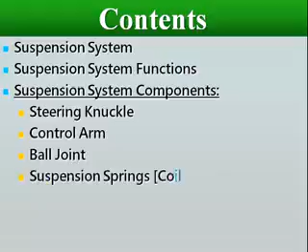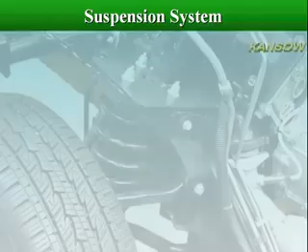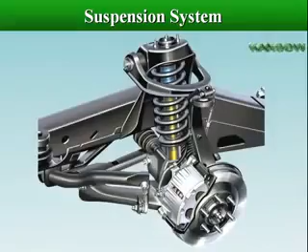Suspension system is the term given to the system of springs, shock absorbers, and linkages that connects a vehicle to its wheels, and allows relative motion between the two. The suspension system separates the wheel axle assembly from body. A vehicle needs a suspension system to cushion and damp out road shocks, providing comfort to the passengers and preventing damage to the load and vehicle components.

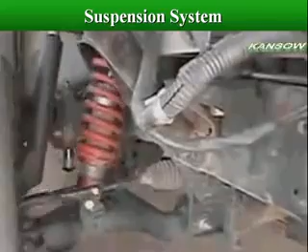The springs and other components compress and expand as the wheel hits bumps or holes in the road. This allows the wheel to move up and down without moving the vehicle body.

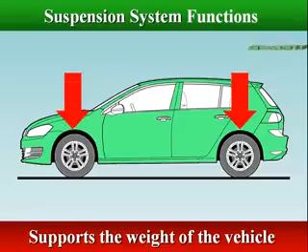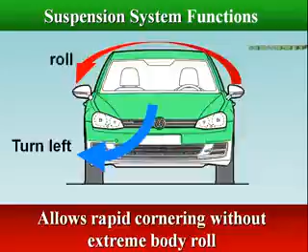Supports the weight of the vehicle. Provides a smooth ride. Allows rapid cornering without extreme body roll. Keeps tires in firm contact with the road surface.

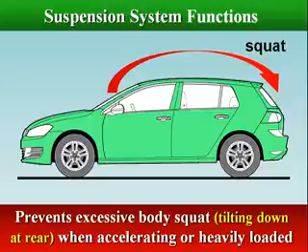Allows front wheels to turn left or right for steering. Isolates the body from road shocks and vibrations. Prevents excessive body squat, tilting down at rear, when accelerating or heavily loaded. Prevents excessive body dive, tilting down at front, when braking.

The suspension system includes the steering knuckle, control arm, ball joint, suspension springs, sway bar, and dampers.

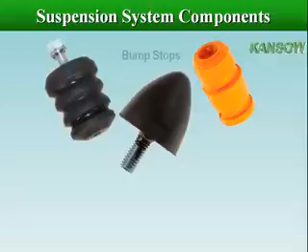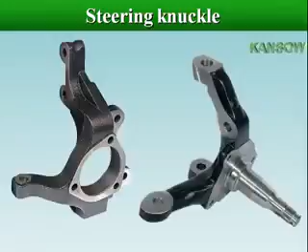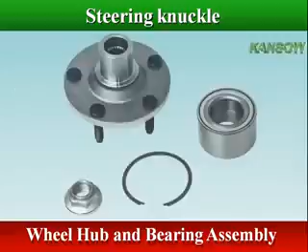The steering knuckle is that part which contains the wheel hub or spindle, and attaches to the suspension and steering components. The wheel hub and bearing assembly is mounted on the steering knuckle. The steering knuckle is mounted with the tie rod for steering, the lower arm, brake caliper, and strut.

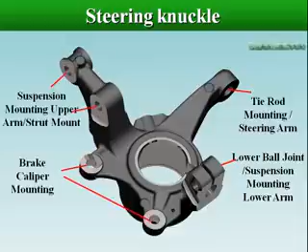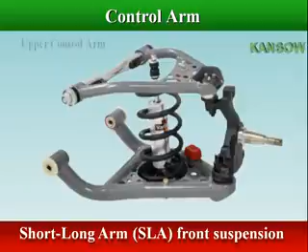Control arm is a movable lever that fastens the steering knuckle to the vehicle's body or frame. Vehicles with short long arm front suspensions have 4 control arms, 2 uppers and 2 lowers, while most strut-equipped vehicles have only 2 lower control arms in the front suspension.

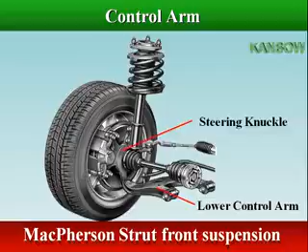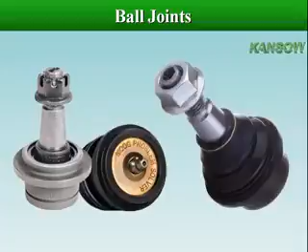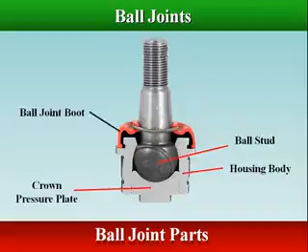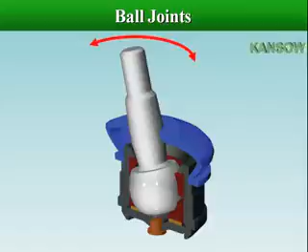Ball joint is a chassis part that connects the steering knuckle to the control arm. The ball and socket design of the joint allows it to swivel, so the knuckles can pivot as the wheels are steered, and allows it to arc so the knuckles can follow the vertical motions of the suspension as it reacts to changes in the road surface.

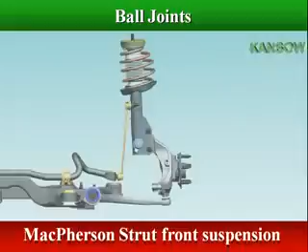Vehicles with short long arm front suspensions have 4 ball joints, 2 uppers and 2 lowers, while most strut-equipped vehicles have only 2 lower joints in the front suspension.

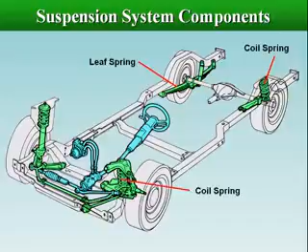The vehicle body is supported by the suspension springs, which are located between the body and wheel axles. There are 4 main types of springs in common use: coil spring, leaf spring, torsion bar, and rubber spring.

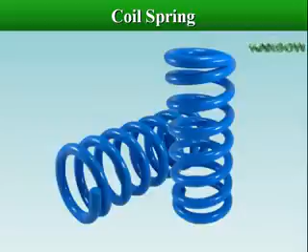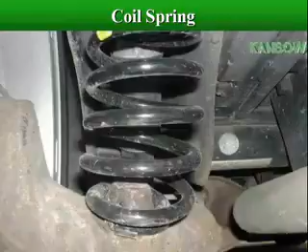A coil spring is simply a spiral of resilient steel rod. It is stretched or compressed by the vertical movement of the wheels. Coil springs are the most common springs used in the front and rear of passenger cars. Coil springs absorb the force of impact by twisting.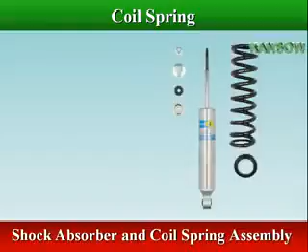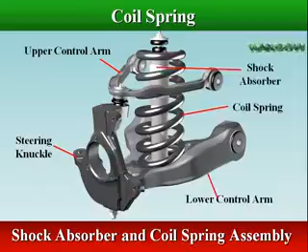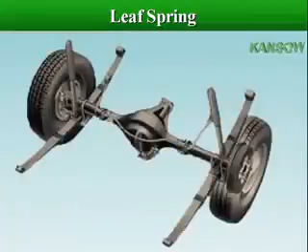The leaf spring is one of the oldest forms of springing. It is usually used on rear-wheel drive vehicles because of its simplicity. They are normally mounted longitudinally.

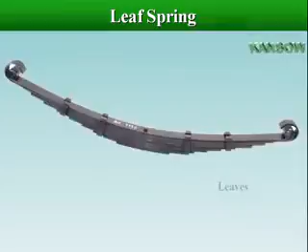Leaf springs are constructed of one or more strips of long, narrow spring steel. These metal strips, called leaves, are assembled with plastic or synthetic rubber insulators between the leaves, allowing freedom of movement during spring operation without creating wear or noise.

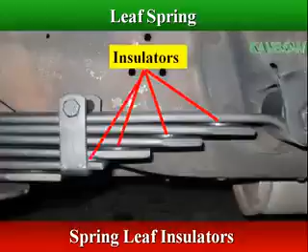The longest leaf, called the main leaf, is rolled at both ends to form eyes. These eyes are used to mount the spring to the frame of the vehicle.

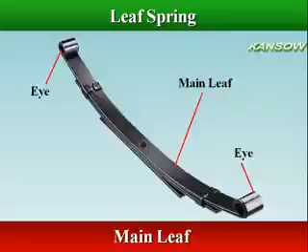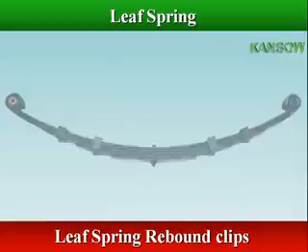The leaves are held together by a center bolt that passes through a hole in the center of each leaf. Rebound clips are formed at intervals around the leaves. They prevent excessive flexing of the main leaf during rebound, and also keep the leaves in alignment.

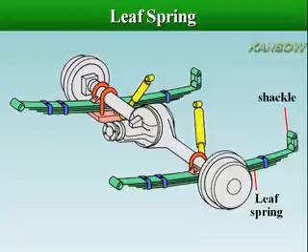The front end of a leaf spring is mounted to a hanger, with a bolt and rubber bushings directly attached to the frame.

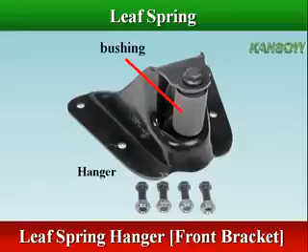The rear end of the leaf spring is attached to the frame with movable mounting hangers called shackles. The leaf spring is also used to locate the axle on the spring. The axle is then clamped to the spring by U-bolts that wrap around the axle housing and through a spring plate underneath the spring.

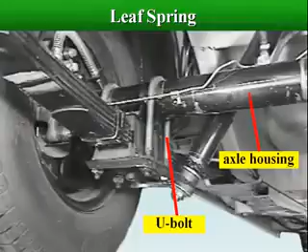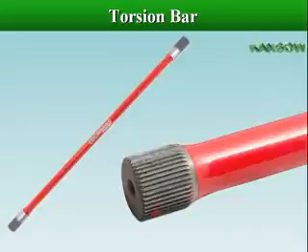Torsion bar is a straight spring steel rod with splined or square ends. One end of the bar is attached to the frame, and the other end is connected to the lower control arm.

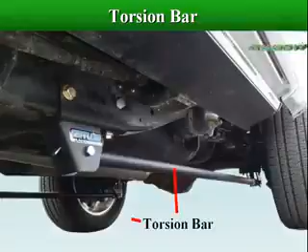The torsion bar twists around its center as the control arm is deflected.

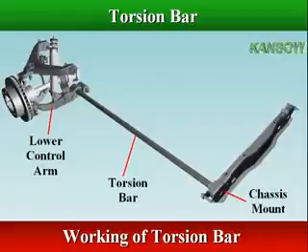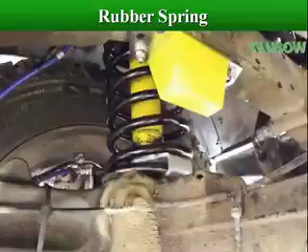Non-metallic materials like rubber can provide the main springing action, but are more commonly used as stops to limit extreme suspension movement. The stops can also be shaped to provide an auxiliary springing function in light vehicle applications.

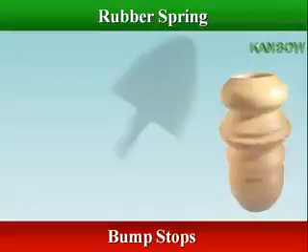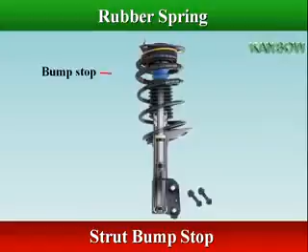Bump stops can help cushion the suspension and prevent it from bottoming out. Bump stops are made in a few different designs, so they mount in different places. Some are placed in line with the piston rods of shocks, others mount between frame and axle, absorbing impact before the axle gets a chance to slam into the frame.

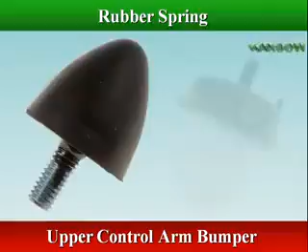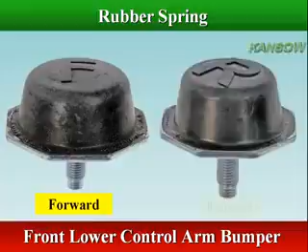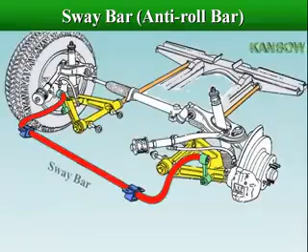Sway bar is also called stabilizer bar or anti-roll bar. Sway bar connects lower control arms on both sides of vehicle. Sway bar operates as a spring when car leans to one side. If one wheel moves up or down in relation to the other wheel, bar twists as it tries to move the other wheel along with it.

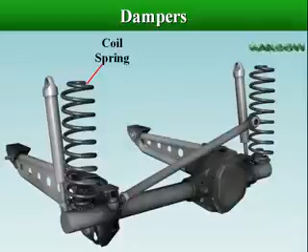The energy of road shock causes the spring to oscillate. These oscillations are restricted to a reasonable level by a damper. There are three types of dampers: shock absorber, coilover, and strut.

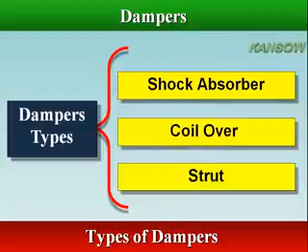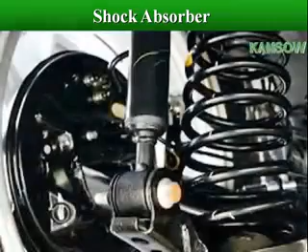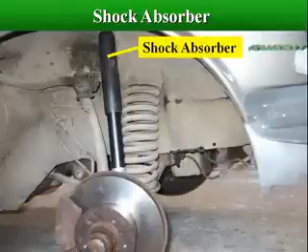Shock absorbers are conventional telescopic dampers. They are used on all conventional suspension systems to dampen and control the motion of the vehicle's springs. One end is connected to the body or frame, and the other is connected to the axle or control arm. Shock absorbers work alongside springs to reduce the impact of bumps and potholes.

There are different kinds of shock absorbers, but they all use a piston sliding in a cylinder filled with oil.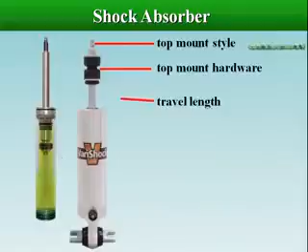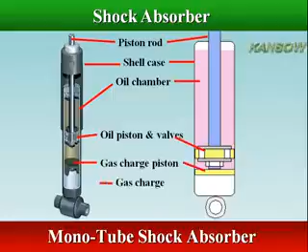A monotube shock has a single piston and rod assembly in a damping case, in which both compression and rebound occur. Also, it has a free piston that completely separates the oil chamber from the gas chamber. The oil flows through a valve in the piston, and the monotube has some volume of gas that accounts for any volume change in the oil.

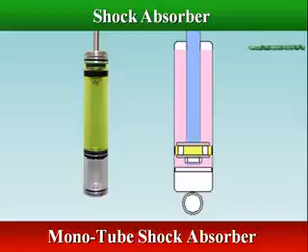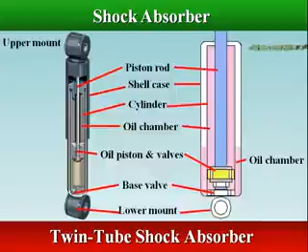Twin tubes have an inner cylinder which moves up and down, and an outer cylinder which serves as a hydraulic reserve. This design allows for an increase in suspension stroke, which provides better ride quality and handling. A valve at the bottom of the shock allows the oil to flow into the reservoir as the piston moves up and down.

A coilover is a suspension device which consists of a shock with a coil spring encircling it.

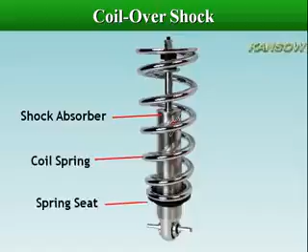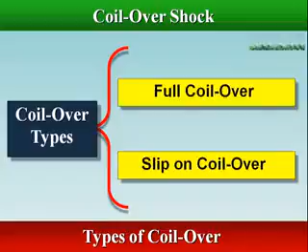There are two types of coilovers, full coilovers and slip-on coilovers. Full coilovers are matched up with a shock absorber from the factory, while with slip-on coilovers, the dampers and springs are bought separately and then assembled.

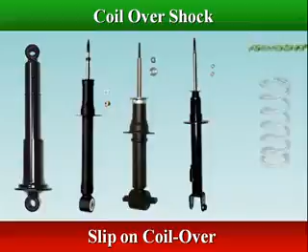Coilover is found on many vehicles. It is used in double wishbone suspension systems, and is often a component of MacPherson struts.

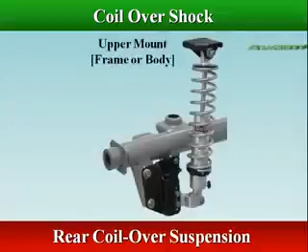A strut is a structural part of the vehicle's suspension system, and is mounted to the chassis on top, coming down through. A strut assembly is made up of the strut, bump stop or boot, spring, spring seat, and mount.

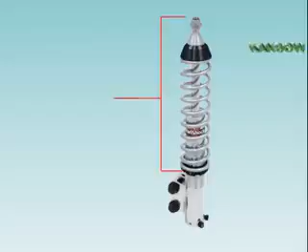The bottom of the strut usually attaches to the steering knuckle, and the top of the strut is connected to the vehicle body through an upper strut mount.